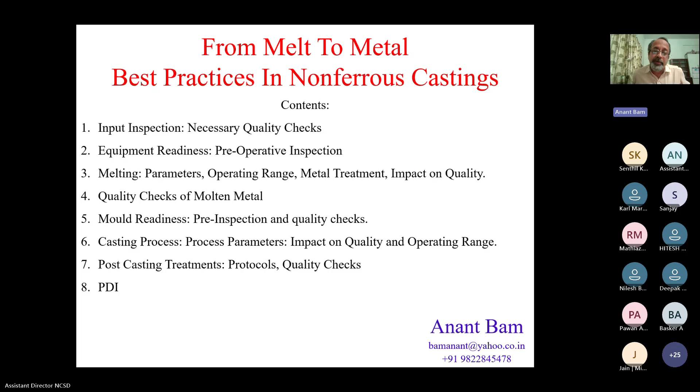Since the presentation was made in a hurry, the slides are less than 70. And if I wish, and if I dedicate more time on it, it can exceed 300 slides. But I will fill the gap by my oration and by my narration. Next slide, please.

Now we come to the necessary quality checks for the input materials. For every foundry, let it be large organized foundry or an MSME foundry, the input material is basic ingots or the scrap, that is turning, boring, the foundry returns or the bought out scrap.

Second important input is the fuel for combustion in the furnace or in any other equipment. Third input is treatment chemicals. Fourth is mold material, coatings, lubricants. Then comes the die coolant, the heat treatment quenching media, and other coolants. And last but not the least are the input materials for post casting treatments, like shot blasting shots, then vibro finishing beads, surface treatment chemicals, let it be anodizing, electroplating, powder coating, painting, anything. And remember, since we are talking on the best practices from melt to metal, we have to consider all these aspects from input to output.

And if we maintain quality checks right from the input, then naturally we will get a good quality output. Next slide, please.

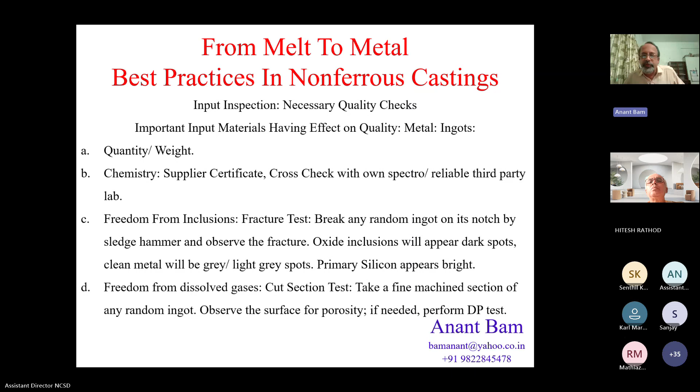Freedom from dissolved gases — again, you have to take a cut section with a hacksaw or bandsaw, and machine that section with a smooth finishing facility using a fly cutter or reverse tool on a lathe, so a smooth machined finish is achieved. Then you observe that smooth surface for porosity, if needed, by performing a dye penetration test.

Although it is not intentionally put or induced, this oxide is present in the ingot due to the process itself, because it was not filtered. Aluminum oxide appears much darker in fractured condition than the mother metal, and naturally we are paying for aluminum, not aluminum oxide. Apart from the commercial issue, aluminum oxide is a very dangerous element for the quality of castings.

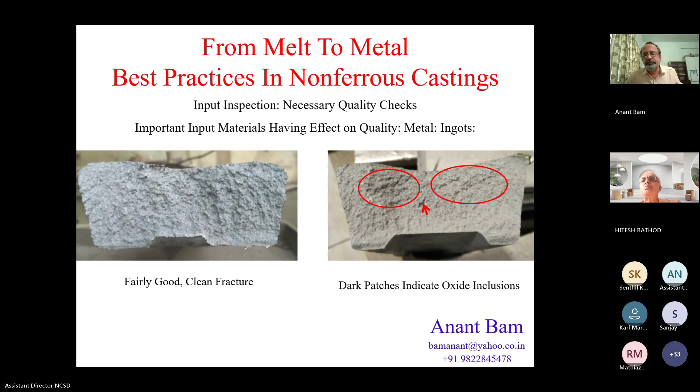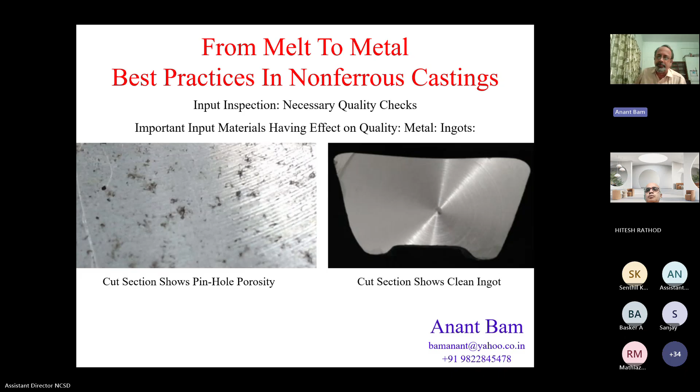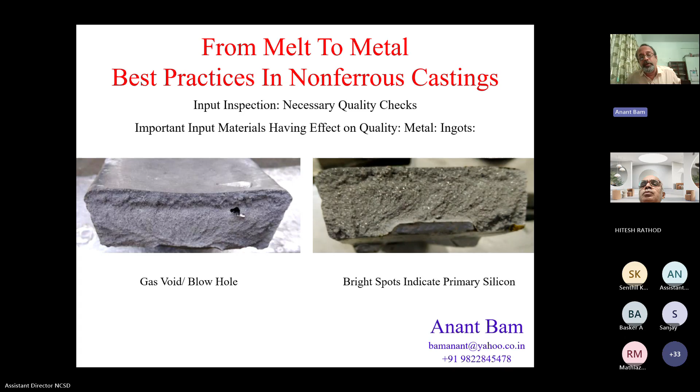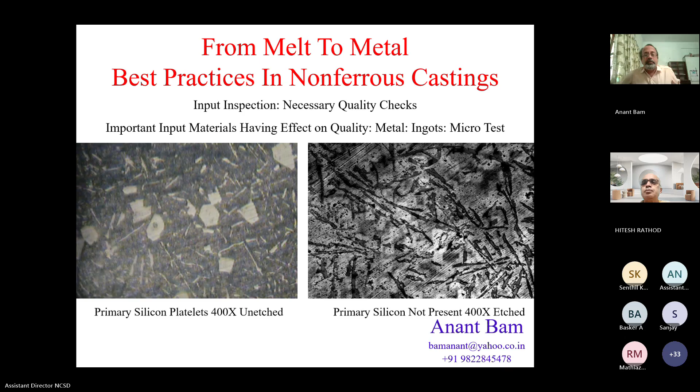If we have in-house scrap as the return or as an input material, then we have to have complete traceability of that material during the total process life cycle. Japanese management tools like Kanban card will help you, or a bin card, to identify and maintain that particular material, its own identity with its alloy chemistry.

When any scrap or any input, let it be in-house or bought out, which is unidentified or unknown scrap, the best way is to mix it thoroughly. If you have got 100 bags of turning borings, empty them all on a clean floor, mix them thoroughly, take a 1 kg sample, melt it in a small crucible or furnace or with a gas burner, take a spectro coin from that and check its chemistry. That will give you the average chemistry of that unknown turning boring.

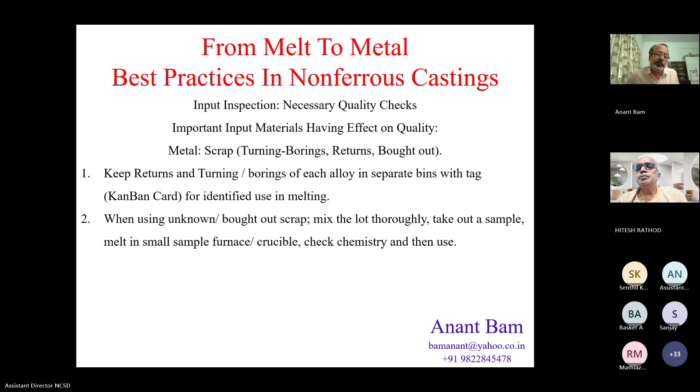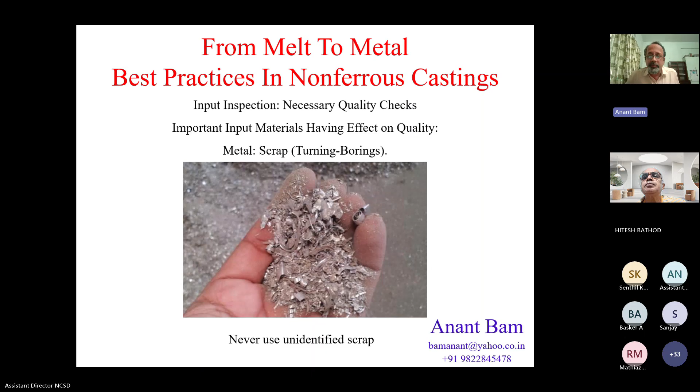For gas-fired furnaces, you get a self-certification from the supplier that the calorific value of the gas supplied to you during this fortnight is XYZ. They give you an average of every day, a daily average submitted to you on a fortnightly basis. That's the standard quality system of every gas supplier. From the LPG supplier also, you get a calorific value certificate.

For the liquid fuels, which is LDO, furnace oil, diesel, or LSHS - nowadays LSHS and FO are not preferred because of the pollution control norms. LDO is quite popular.

So first, again, check the quantity. Then check the viscosity or the density. Check the calorific value. If you don't have a calorimeter, ask for the supplier certificate and randomly get the calorific value checked from a NABL accredited lab. Check for contamination. If you are using heavy oils, that is furnace oil or LSHS, then water contamination is quite likely.

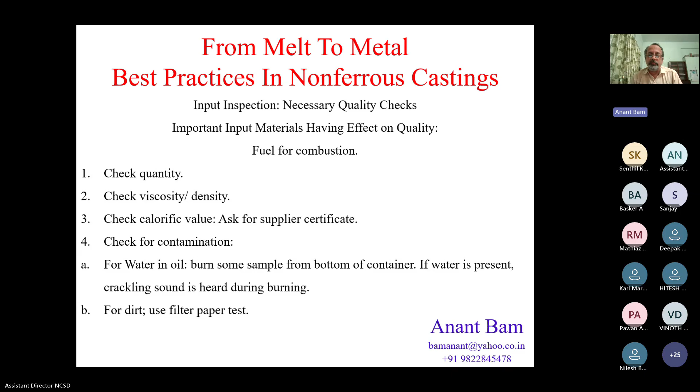So these 2 or 3 tests will qualify your input material, which is furnace oil or fuel for your own furnace.

Treatment chemicals. I see that there are 2 people from Ceraflux group attending this meeting, somebody from iTech, then Mr. Gajanan Kadukar, and mostly Mr. Dhumal is also there on the line. So they will understand it very well.

Majority of treatment chemicals, which are salts, are hygroscopic in nature. Secondly, some proprietary treatment chemicals, which are mixtures of a variety of salts and other chemicals, have their own internal reactions going on as well. Hence, every chemical has got its own shelf life. So first and foremost, before accepting any treatment chemical, check for the expiry date. If you are getting a lot which is close to its expiry, ask for a hefty discount and consume that lot within the expiry period itself. If you are not able to consume it, there is no guarantee from the supplier side for the performance of the chemical.

Next is naturally check the quantity. Then ensure dryness of powder flux or tablet or pressed tablet of any degasser or other chemical, because these are hygroscopic materials. Usually all these materials have got their own color, and if they absorb moisture, the color darkens substantially. So observe the color of the chemical also. If any moisture is present in it, then it will not be free flowing, it will form a lump. So ensure dryness of the powdery flux as well as tablets.

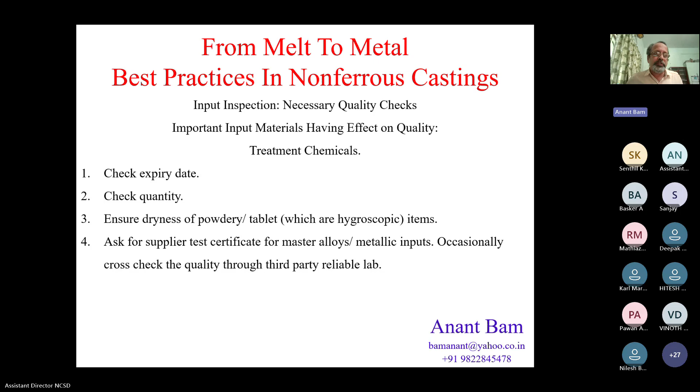Next input material is sand for molding as well as core making. It has got a direct impact on the surface finish of your product. Apart from surface finish, it has a direct impact on the quality of your outcome by way of its permeability, its loss on ignition or gas generation, its binding properties, and many such things.

First of all, for the sand, check the sieve analysis. If you have got a macroscope or a stereo microscope, check the angularity. If you have facility, check the silica content or go for the supplier certification. From the binder side, if you are using organic binders, with the resin and hardener system, you can have a quick shop floor test by preparing a sample, maybe 100 grams of prepared sand. You can put it into a random mold and check for the stripping time, the setting time, and curing time, then check for the hardness of that particular prepared sample.

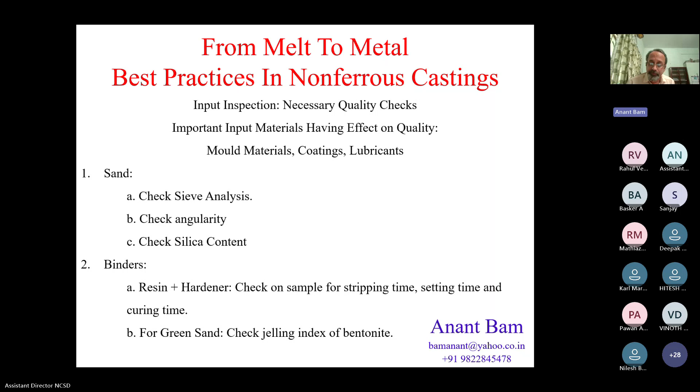This is a sample of sieve analysis. If you have got a single peak, that sand is of average quality. And if the peak is at the same point but the graph moves gradually up like a bell-shaped curve, then it's slightly better, a good quality of sand.

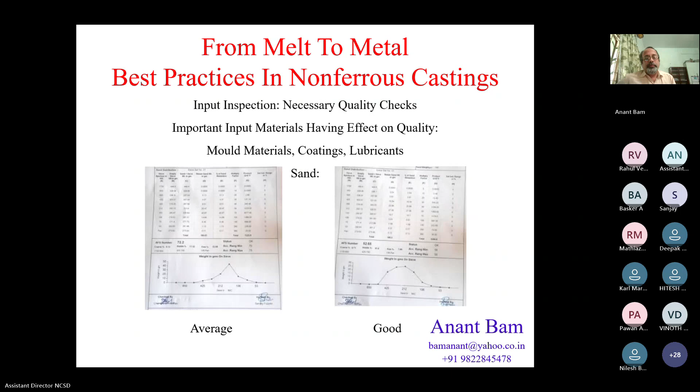Coatings. Coatings are applicable to sand mold, sand core, as well as to the die surface. Coating is the final element which delivers its own surface finish to the casting, but before that, its primary function is to create a barrier surface between the metal and the mold, to prevent the metal mold reaction, coating is necessary.

So for any coating, the first and foremost test is density test or viscosity test, and a quick test can be checked by a B4 cup or by a buoyancy meter. Next slide, please.

This is an image of a B4 cup. It's a conical cup with an aperture or measured hole on the bottom. The volume is also known. There is a marking, a stand, and you have to use a stopwatch along with it.

The process is: put the cup on the stand, put an empty vessel at the bottom, hold your finger from the bottom of the hole on the cup to plug it, pour the prepared coating into the cup up to the marking line, and simultaneously release your finger from the bottom hole and start the stopwatch.

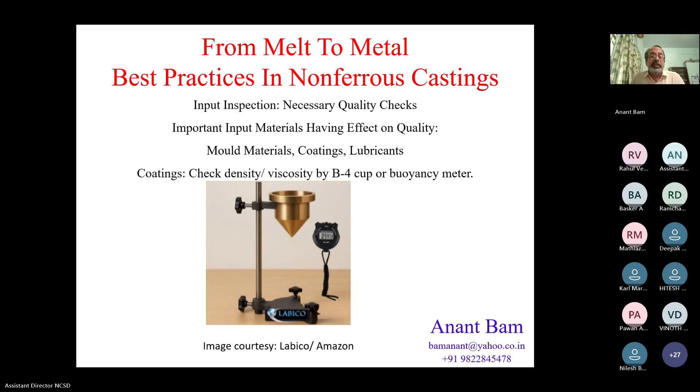Lubricants. For high pressure die casting, everybody is using lubricant. The main function of lubricant is again to prevent soldering, and the secondary function is to have thermal balance of the die surface.

Even today, a lot of foundries, or the majority of foundries, are using mineral oil as the basic lubricant, emulsified in water, maybe 1%, 2%, 5%. The dilution depends on the manufacturer's recommendation and the intricacy of your casting. So first and foremost, check the dilution of the lubricant.

Rather, it's very difficult to check the dilution. So you have to ensure a process of making correct dilution of the lubricant. You have to prepare a recipe by which the recommended dilution of the lubricant can be achieved.

I have witnessed a case in a very reputed foundry making more than 10,000 tons a month of aluminum pressure die casting. They were not monitoring the dilution of lubricant. There was a complaint of frequent soldering and blackening of the die surface.

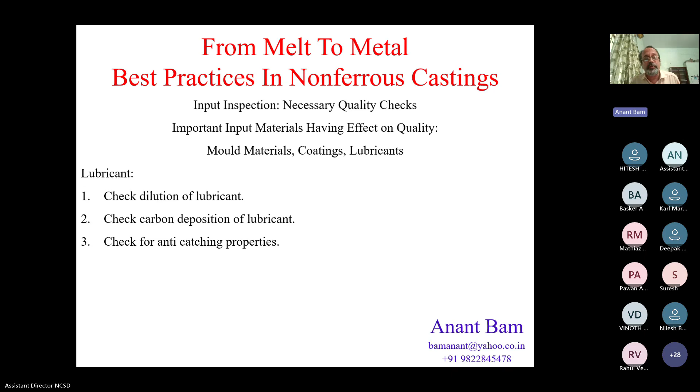When a system was set up for measuring the mother lubricant, measuring the diluting water, measuring the TDS and quality of the diluting water, and using filtration before passing it onto the lubricant pump, these defects were gone. Next slide, please.

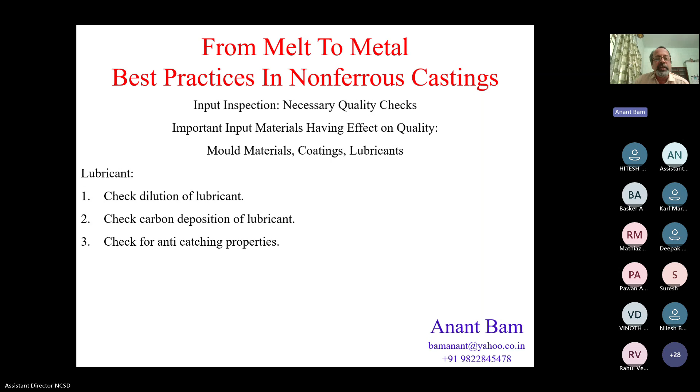Now for the coolant or quenching media of the heat treatment furnace, first and foremost is to check for TDS, total dissolved solids, or the salinity of the water. Excess TDS will lead to salt deposition, calcination, and loss of cooling effect in the cooling line.

Any salt or contamination in the quenching media will lead to discoloration or blackening of the casting after heat treatment. And once the casting blackens during quenching, it is very difficult to get back its own white luster. So you have to be very careful and use preferably demineralized or DM water for quenching media as well as in the cooling lines.

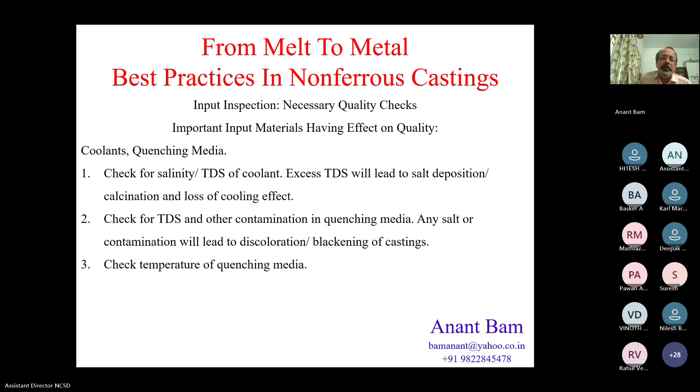Now we move on to other input materials for post casting treatments: shot blasting, glass bead blasting, vibro finishing, and other surface treatments. For aluminum shot blasting, stainless steel cut wire shots are highly preferred. I recommend them because they last long and do not break easily. They do not deliver its own color onto the casting. Preferable size is 0.3 mm to 0.7 mm for aluminum and 0.5 mm to 1 mm for copper alloys.

How many of you are using a mixture of 2 or more sizes of shots? Please comment or raise your hand. I want this session to be interactive. How many of the audience is using a mixture of 2 or more sizes of shots in shot blasting?

Shailesh, have you spoken to speaker or phone? What do you say, huh? We are talking currently, sir, we are talking with him. Yeah. Yes, sir. Sir, he is rejoining, sir, it will take 1 or 2 minutes, sir. Shailesh, what happened? Network connection, he is joining by mobile. Okay.

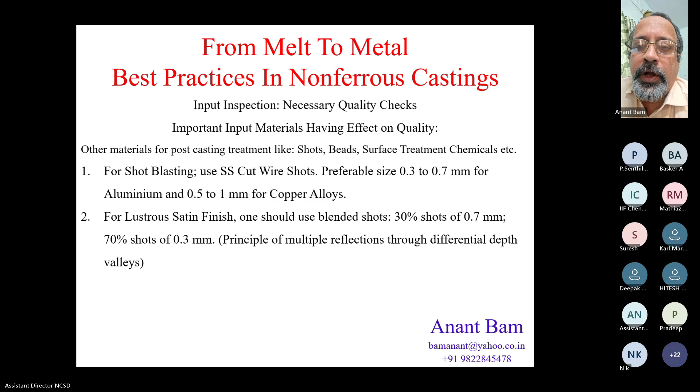So I was talking about shot blasting and the benefits of using mixed shots. When we use mixed shots, the indentations or depressions created on the surface by shot blasting are of mixed sizes, and that creates multiple reflections of the incident light. These multiple reflections make the casting brighter and more lustrous, like a metallic satin finish. Hence, if possible, I recommend using such a mixture of shots. The finish you get is out of this world, and you will fall in love with it. Nothing wrong in using single size of shots, but using a mixture of shots is the next level of quality in surface treatment.

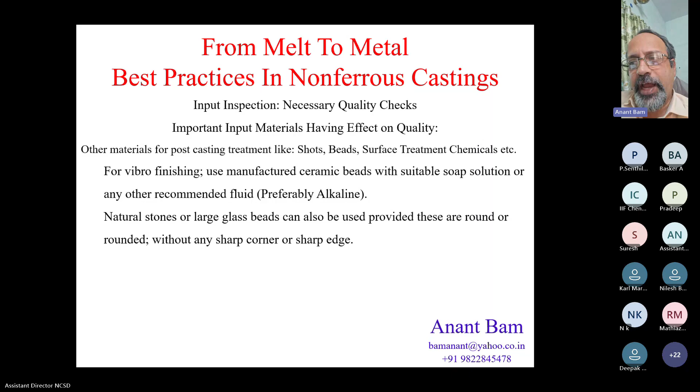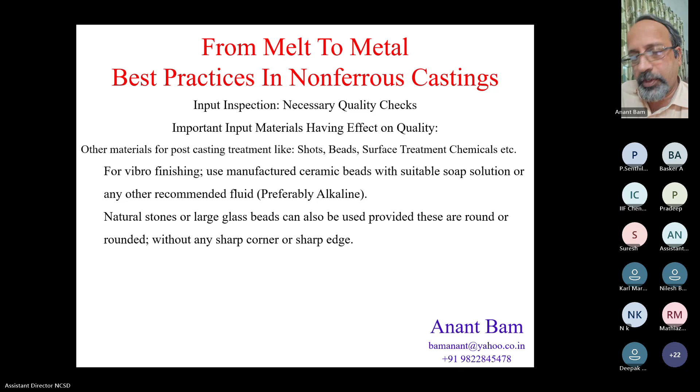Now we come to the equipment part of it, equipment readiness. Remember, we have not started the casting process as yet; our checklist is still going on the input side, even now, on the equipment. First inspection is for the furnace lining. Second is for the crucible condition. Third is for burner cleanliness. Then oil preheater and pump unit operation, filter operation. Then, if you are using resistance furnaces, condition of coils, their connections, and their maximum current drawing capacity. Along with the furnaces, we have thermocouples and temperature indicators, and PLCs to control or operate the furnace based on the inputs from the thermocouple. Then we have the degassing unit, and other quality instruments like the reduced pressure test apparatus or density index apparatus, and any other quality instrument. Next slide, please.

Check the lining of the furnace for any likely crack, worn out lining, or damaged lining if you are using an induction furnace. Repair it immediately if observed. Monitor the lining life and change the lining at the recommended number of heats or recommended number of hours of operation, irrespective of the condition of the lining. This becomes a part of total productive maintenance, TPM. If you maintain the lining in good condition, then naturally the downtime of the equipment is zero.

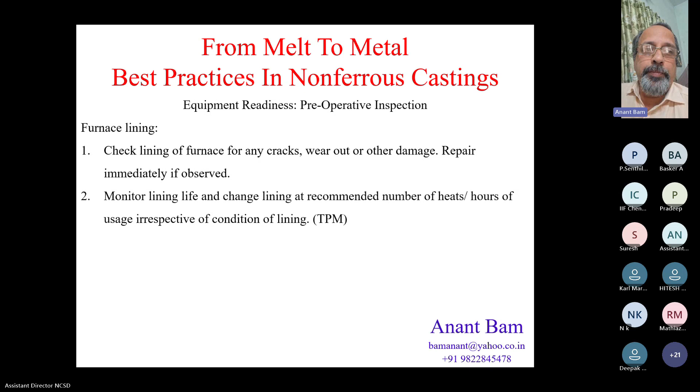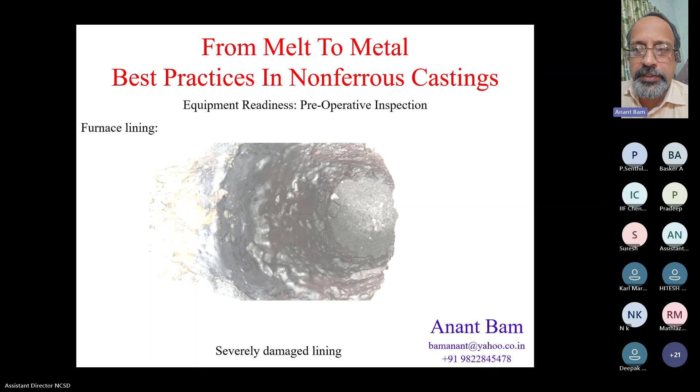Crucible condition: before starting, check the crucible for any cracks, check for oxide buildup. It's a frequent, routine check — all checks are daily checks or every heat-wise checks. Before you put in any new material, check the crucible condition, check the oxide buildup, check the thermocouples for oxide buildup, and check other equipment like ladles, spoons, or any hand tools. All the checks are routine and daily checks; there is no escape to it.

Monitor the crucible life by hours of use or number of heats, and change the crucible after the recommended life, irrespective of its condition. Because if the crucible cracks or fails during operation, it becomes a very big mess to clean the furnace. It may invite short circuit, it may invite accidental shocks to the operator, and the repairs or damages from a broken crucible during operation take a few days. Instead, if the recommended lifespan is over, on a weekly off just change the crucible even if it is apparently good or looks to be in working condition. That will prevent all these pitfalls, and it's again a TPM activity.

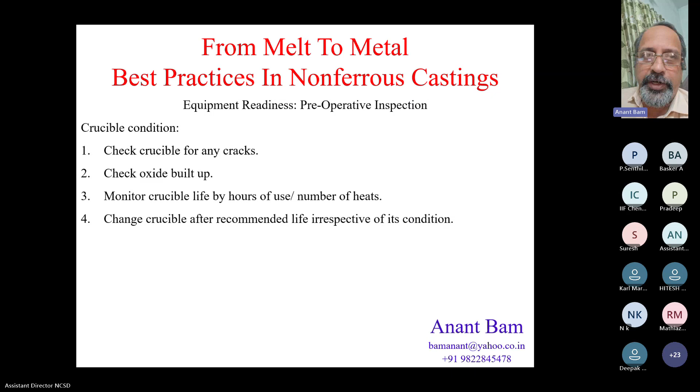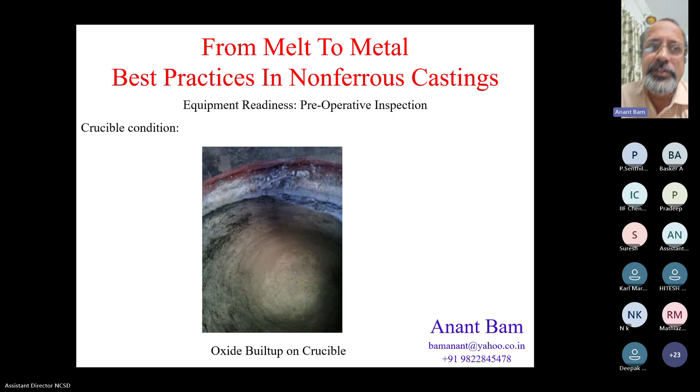So if such a thick oxide lining is present on the crucible, it keeps dissolving into the molten metal, creating oxide inclusions in your casting — that's a serious quality threat. But apart from that, aluminum oxide is a bad conductor of heat, so the thermal conductivity of the crucible reduces drastically, and hence to melt the metal you require more and more energy input. That becomes unviable. Next slide, please.

Burner cleanliness. Check the burner nozzles daily and clean them thoroughly. Check the airflow diaphragm or the baffle and its adjustments. Check blower pressure and flow. And after all that, finally adjust the flame to reducing atmosphere and correct dwell time.

I got a photograph for that. I will explain that into that slide. Next slide, please.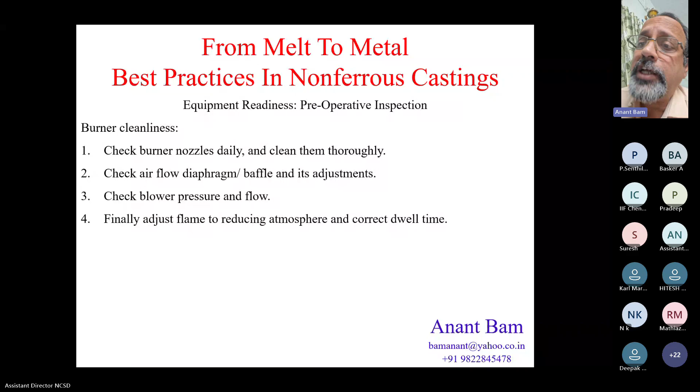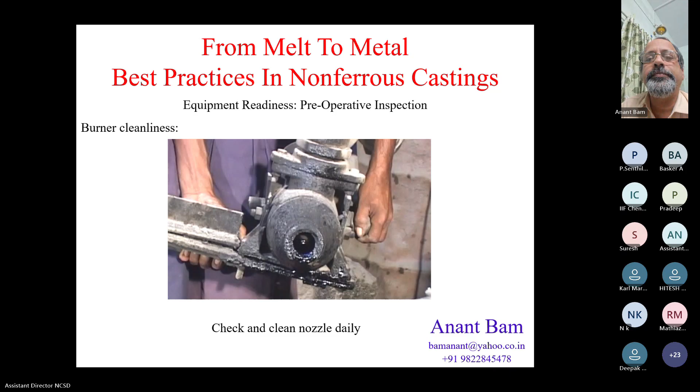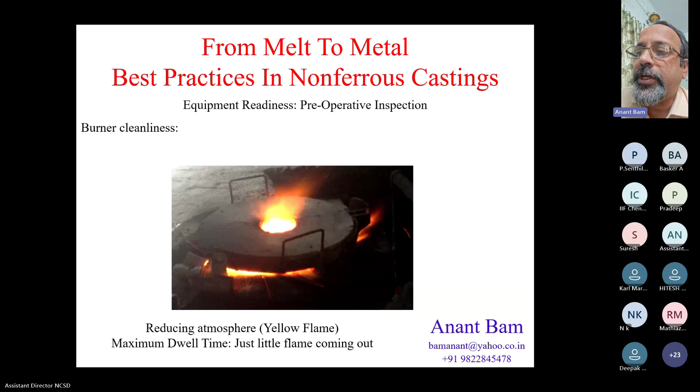That's the first point. The second point is that a very little amount of flame is coming out from the aperture of the lid. That means the flame is taking its maximum time inside the furnace chamber, and very little of it is going out by way of flue. So this is an indication of efficient operation along with reducing atmosphere.

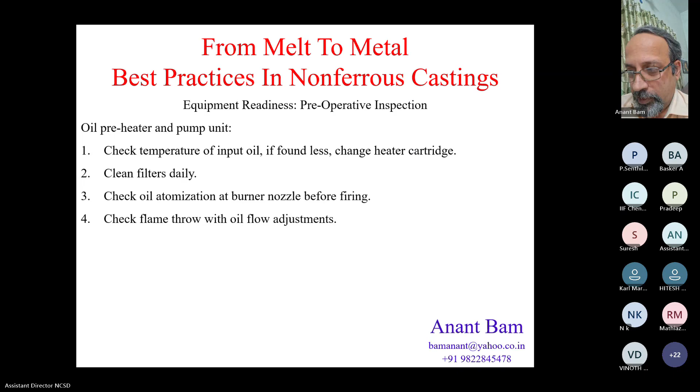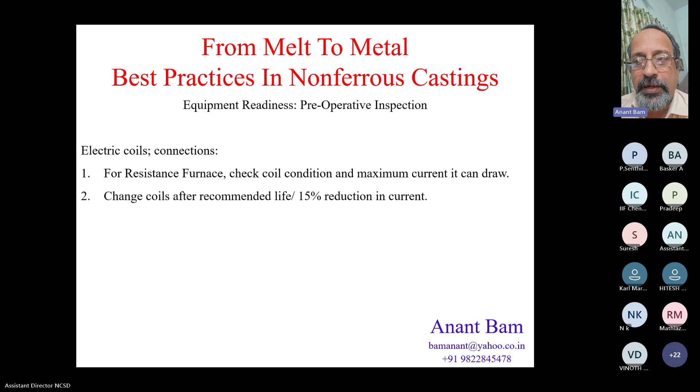The moment it reduces by 15% or more, then it's time to change the coils, because such a reduction in current carrying capacity happens due to oxidation of the coil element or the kanthal metal in the coil. Next slide, please.

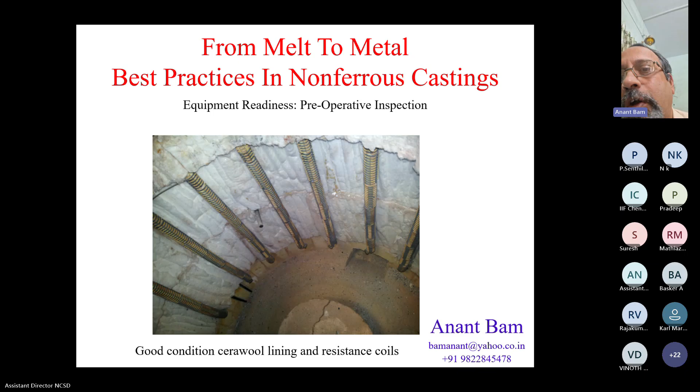This is a typical view of an electric resistance furnace before fitment of the crucible. You can see that the ceramic foam or cerawool lining is in very good condition, as well as the heater elements, the coils, which are also in good condition.

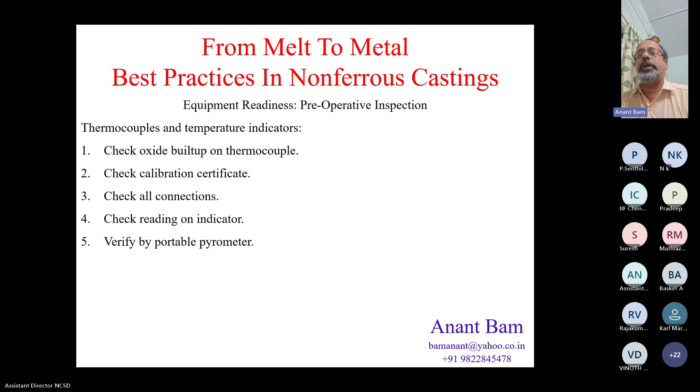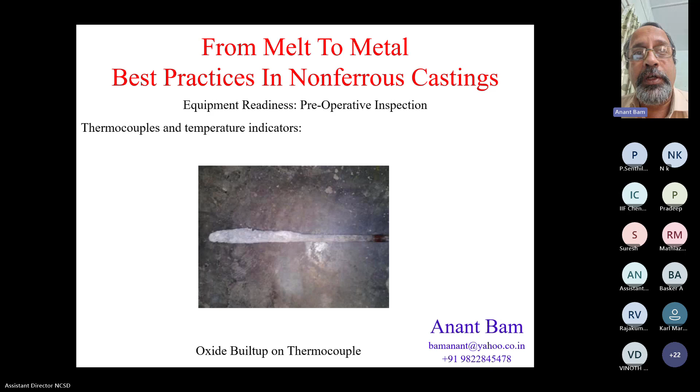Here is a photograph of a dip-type thermocouple having a very large deposit of oxide on it. As I told you, these oxides keep dissolving into the metal, making it dirty. It's also a bad conductor of heat, so the reading taken by the thermocouple is a false reading. The metal might be quite hot, hotter than the reading shown by such a thermocouple.

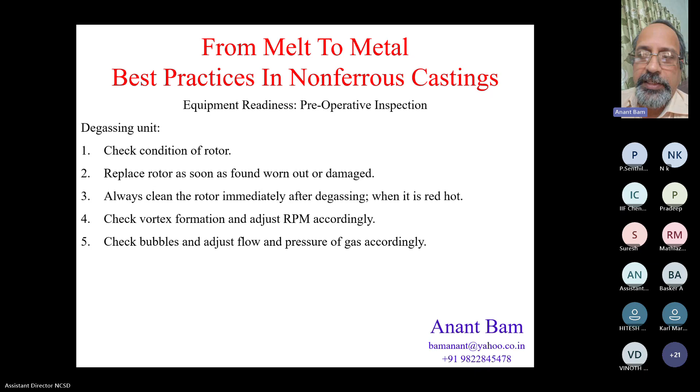If you find such metallic particles on top of the furnace, rest assured your bubble size is perfect. With a vortex showing a 4-inch level difference between sidewall and the eye of the vortex, and deposition of fine metal particles on top of the furnace, these are the two indicators that your rotor RPM is good and your bubble size is good—you attain maximum efficiency of degassing in such a condition. Next slide, please.

This is a photograph of the dirtiest rotor I have ever seen. I have to tell you that this white, inverted-T-shaped thing is the rotor of the degassing machine. I cannot see any fin or rib—all I can see is oxide, oxide, and oxide, thoroughly deposited for ages. Naturally, the whole shaft is also clogged.

Nitrogen or argon is not coming out, this thing is not able to churn, and hence degassing is just for show.

Again, this is first-hand information—I was a consultant there. I was called in for a day because degassing was not effective. Even after doing degassing for 2 hours, their density index was not coming within range. They asked me to kindly advise them, and the matter was solved on site itself.

If you have such a dirty rotor, nobody on this earth can degas your material. The best way is to change the rotor and then maintain it in good condition by cleaning it every time it comes out of the furnace. Next slide, please.

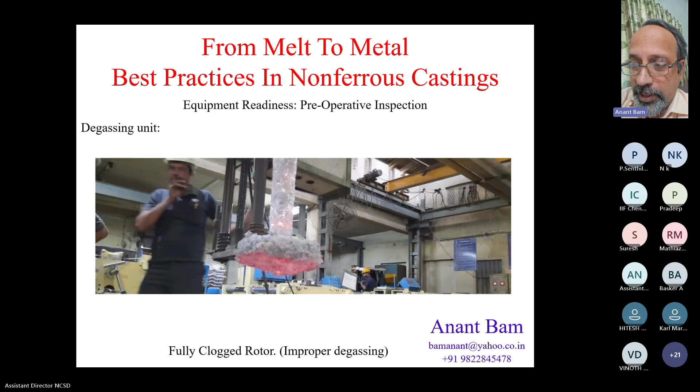Equipment readiness of reduced pressure test apparatus, density index apparatus, and other instruments. Check oil level of the vacuum pump. This is the first and foremost check.

The oil in the vacuum pump is like blood in your system, blood in your body. The moment the oil level in the vacuum pump drops, the vanes of the pump start rubbing on the surface. And after such rubbing, maybe in 1 hour or 2 hours, the pump fails. It fails to create vacuum. And why? Because somebody did not top up the oil. It is not a frequent top up. The requirement of oil is hardly 300 ml, and the top up required is maybe once in 6 months or so. But if you don't top it up, you lose the pump.

Second, check the vacuum gauge and confirm vacuum formation. Start the vacuum or the reduced pressure test apparatus without any metal or sampling crucible within it. Close the lid. See that the vacuum gauge is indicating vacuum. Try to lift the lid at 80 millibar partial vacuum. No person by their own hands can lift the lid. The vacuum created is so strong that if you try to lift the lid, the whole machine, 50 kg, 100 kg, gets lifted along with it. So that's a simple test of effectiveness of vacuum creation.

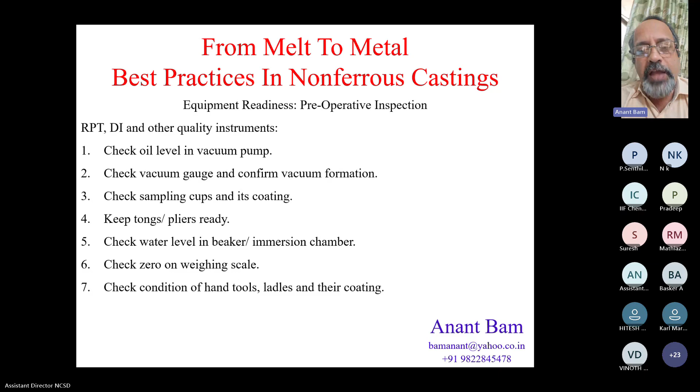Now we come to principles of melting. Melt the metal as quickly as possible. Melt it with minimum energy consumption. Achieve complete solution of alloying elements or any top-up materials. Melt the metal in as clean a condition as possible. Keep it gas-free. Avoid overheating and minimize melting loss.

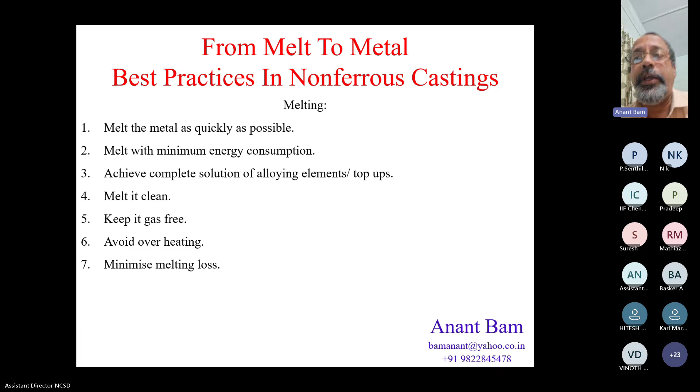Everything of it is very well explained in my earlier presentation on melting and metal treatment, so only this one slide I have taken from that. I'm not going to explain it further because we have already exceeded the scheduled timeline. Move on to next slide.

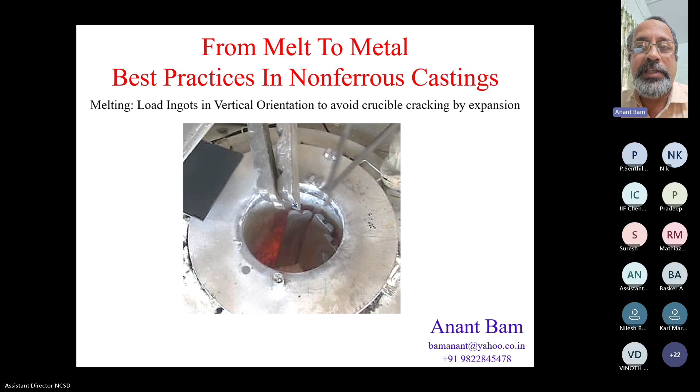While starting the melting in the empty crucible, one has to take care that ingots have to be placed vertically and they have to be loosely packed, not closely packed, because before melting, the ingots expand. There is thermal expansion of aluminum. And if the ingots are not loosely packed, that expansion adds one onto other, and literally it leads to cracking of the crucible by thermal expansion. So ensure that the ingots are stacked vertically and loosely packed. Next slide.

We go on to metal treatment, again only one slide from the previous metal treatment presentation. First, metal treatment is cleaning. It is usually done by flux. But in recent times, Japanese foundries are avoiding fluxes and moving to inert gas or vacuum melting to avoid oxide generation itself. Why do we need to clean the metal? Because either the ingots or the input material itself is dirty, or there is freshly induced, freshly created aluminum oxide during the melting process itself. Hence, we have to clean that oxide. We have to separate that oxide from the metal by applying cleaning fluxes.

So if the metal is clean initially itself, do we really need to clean it? Again, the answer is no. So the Japanese have moved ahead and they have avoided fluxes by way of vacuum or inert gas melting.

Some foundries in India, especially Maruti Suzuki, are trying that method, and they have succeeded substantially in it. But even now, even today, they are not able to eliminate flux. They have reduced consumption of flux drastically, but still they have not eliminated it. But very soon it will happen.

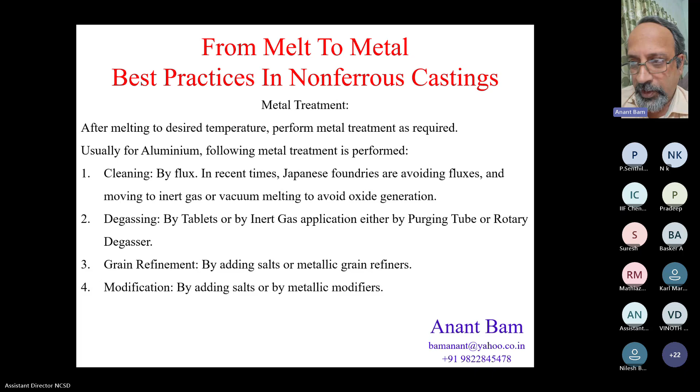Modification of silicon increases or leads to better elongation, and also it helps in giving quick response to heat treatment. Next slide, please.

These are photographs of macro structure. Every sample is 40 mm diameter. On the left hand side is without grain refinement. On the right hand side is with grain refinement.

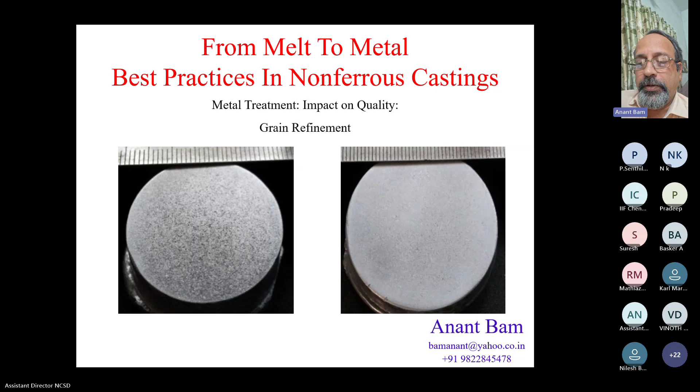Next slide. This is ASM grain size classification number. Number 1 is finest grains, number 6 are the coarsest grains. As per ASM macro grain size classification, there are 6 varieties: 1, 2, 3, 4, 5, 6.

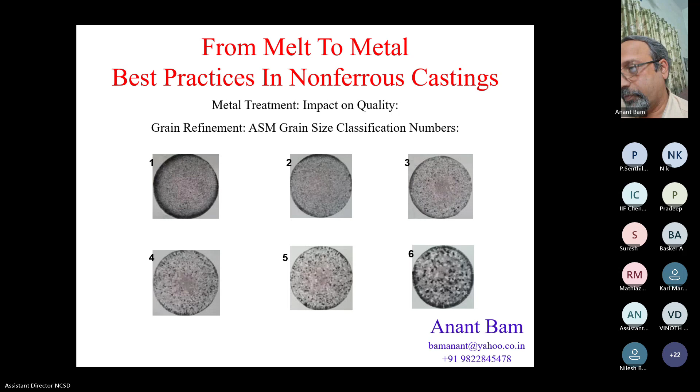These are to be checked on macrograph of 40 mm diameter sample. You take a fine machining cut on it, or you scrape it on a belt grinder, and then perform etching by macro agent, either HF or preferably the etching agent Tucker's etch. Next slide, please.

Next slide, please. This is ASM classification of levels of modification. Level 1 is unmodified, level 6 is super modified.

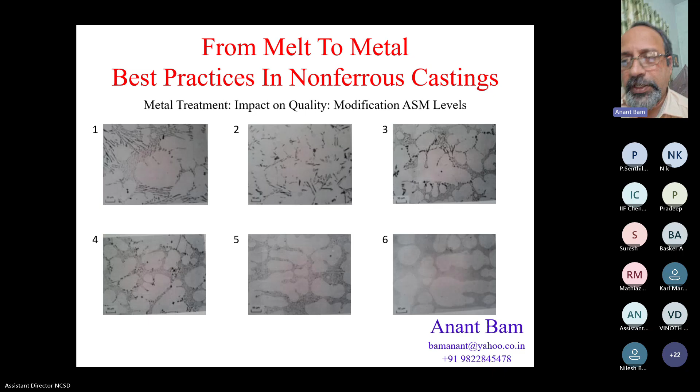Practically achievable levels are level 3 and 4. With little difficulty and good quality control, level 5 is also achievable. But level 6 can be achieved only in laboratory scale. Also, it is not required in any practical application. Even for aerospace application, level 4 or level 5 modification is recommended. Next slide, please.

Quality checks of molten metal: preferably you should have a temperature log, then you should have a chemistry report record, you should have a density index record, and you should have a K mold record. Next slide.

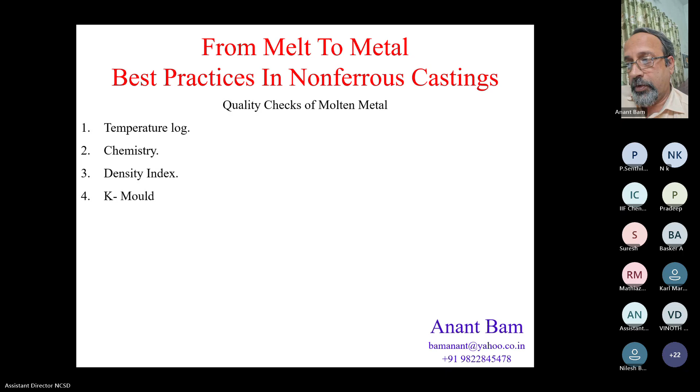When you are refining the material by titanium and boron, the effectiveness of grain refiners vanishes after high temperature, maybe exceeding 780 degrees Celsius, and that change is irreversible. The titanium is visible in spectrometer, but it fails to refine the grains. So you have to ensure that in the life cycle of casting, that is from solid to melting to holding to treatment to casting again, it has not crossed 780 degrees Celsius at any point of time.

That is why it is important to have a temperature log, or to have a permanent dip type thermocouple connected to PLC, having a direct shut off control on the furnace. And the range should be set in such a way to allow certain buffer zone.

Because the furnace lining is usually at 900 or 1000 degrees Celsius coil temperature, and the metal is at 730, 740, 720 degrees Celsius, the delta T, the temperature difference, is to the tune of 300 degrees Celsius, 250 to 300. The heat transfer formula for heat transfer is mCp delta T.

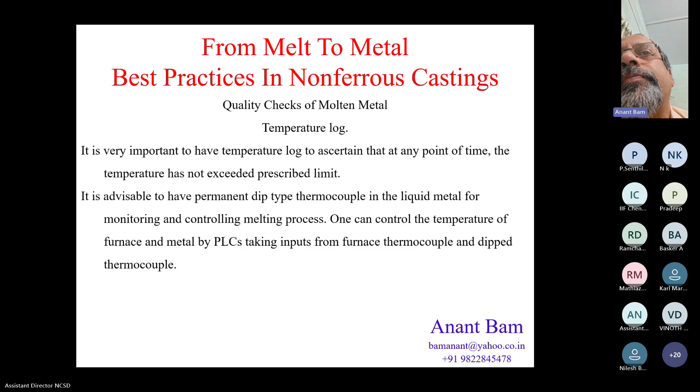Chemistry: every casting qualifies for customer acceptance only if chemical composition is within prescribed limits. Check button samples for spectrometry before the metal treatment for the basic chemistry, basic elements. If found acceptable, then only proceed for metal treatment. Otherwise, balance the chemistry by alloy addition or by diluting, as the case may be.

Cross-check final chemistry after treatment for verifying titanium, boron, sodium, strontium, or whatever you have added as metal treatment element. Sufficient percentage of titanium and strontium ensures grain refinement and modification. Next slide, please.

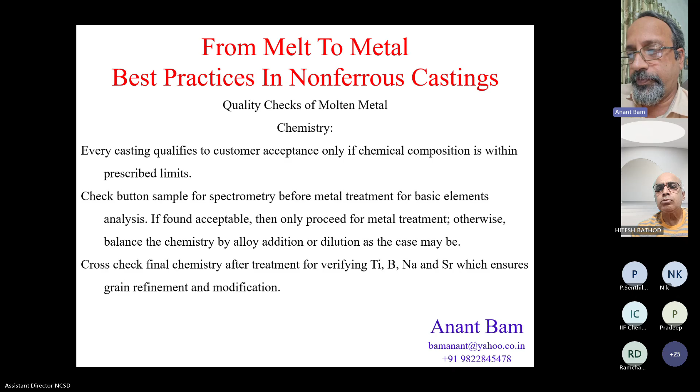A typical spectro button. Next slide.

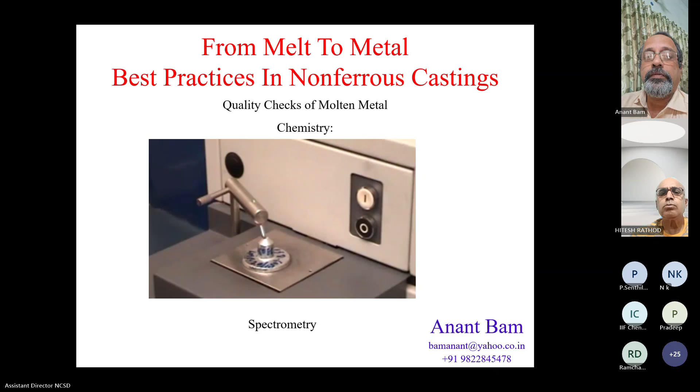Check density index before pouring and at every 30 minute interval during holding. For commercial applications, density index should be below 10%. For leak-proof engineering castings or structural castings, it should be below 5%. For critical castings or helium leak-proof castings, it should be between 1% and 3.5%. For electric conductivity and aerospace grade castings, density index should be below 1.5%.

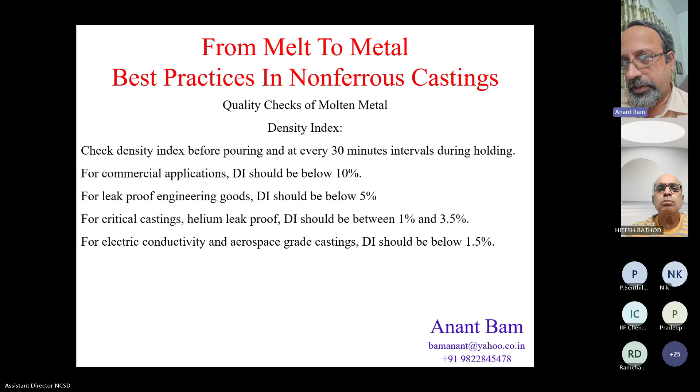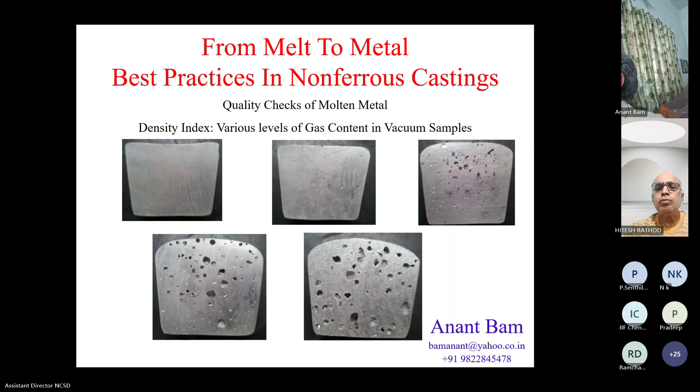Next slide, please. K mold. The K value should be checked and maintained below the prescribed value. Every customer should recommend what the K value should be. Ideally, the K value should be 0.

One must preserve all these samples - spectro button, density index samples, and K mold samples - for the time prescribed by the buyer, or for a minimum of 3 months. Next slide.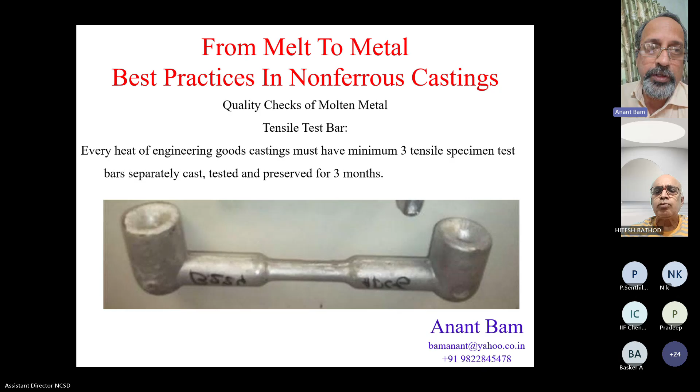This is a sample of a separately cast test bar. Sometimes you have to cast an integral test bar. Sometimes you have to take a test bar by cutting a casting, sacrificing that casting. It depends on the quality requirements of your buyer. Next slide.

Now, input inspection for sand casting. Check quality of sand, check the mold hardness, check for smooth, hurdle-free surface and non-friable edges. Next slide.

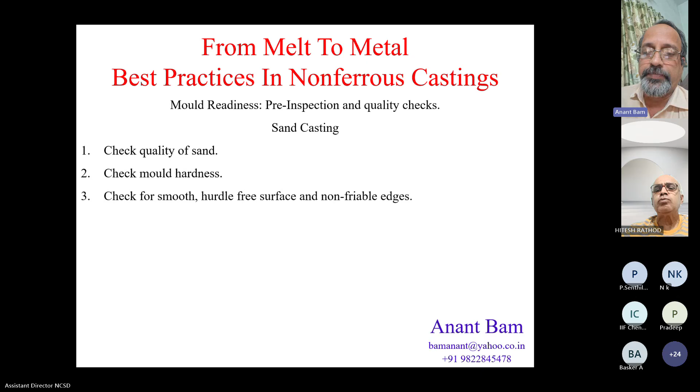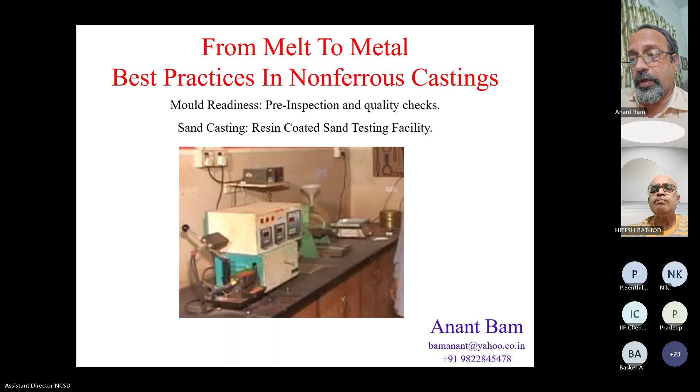For resin coated sand, there are other tests like tensile test, hot tensile test, stick point, apart from the standard sieve analysis. Next slide.

Typical photographs of shell core making, then core setting, and dip type core coating. Next slide.

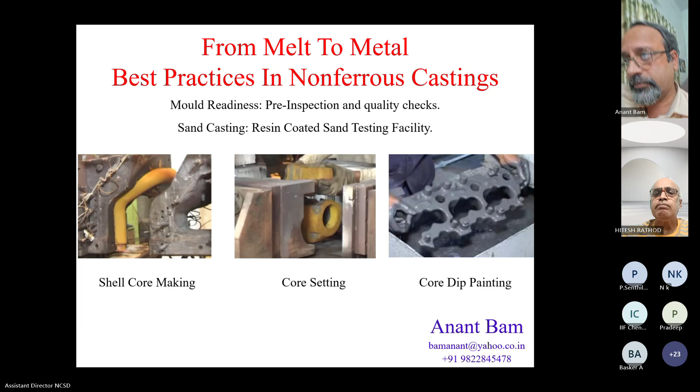In case of die casting, you have to monitor die temperature, the die coating and its thickness, and cleanliness of the vents. Next slide.

99% of the time, the die is preheated by gas burners. In case of pressure die casting, the thermoregulator takes care of it. Next slide.

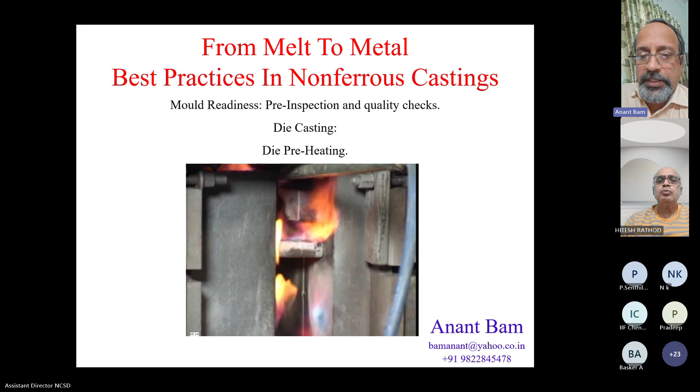You have to monitor and record die temperature frequently. Next slide.

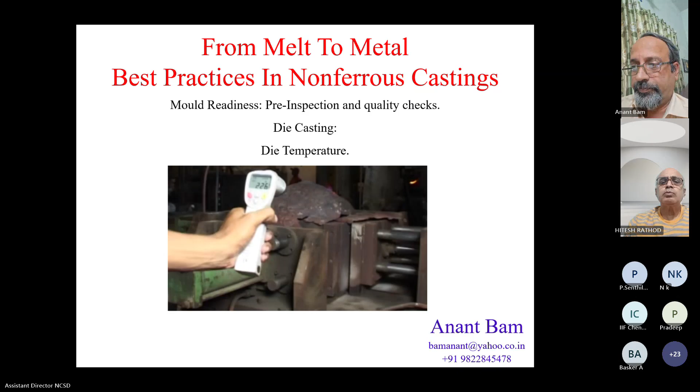On the left hand side is spray coating on a hot die surface. On the right hand side is application of thick coating, or riser coating, by brush. Next slide.

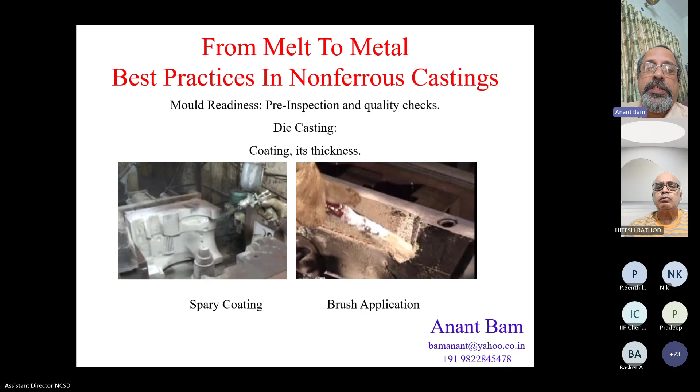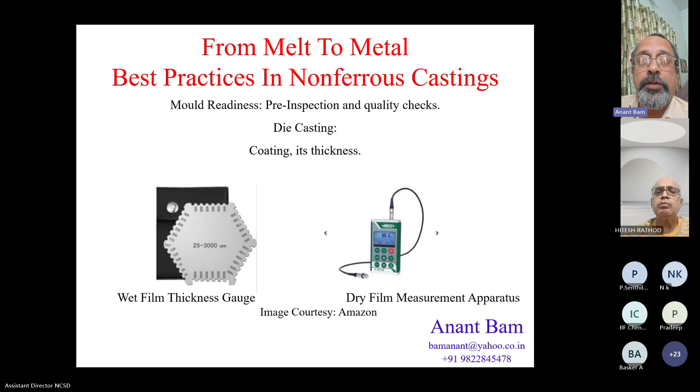Next slide, please. On the left hand side is a typical photo of a wet film thickness gauge. This is a hexagonal gauge. You can also get a rectangular gauge having one or two sides with gauging serrations. On the right hand side is the dry film thickness measurement apparatus - not ultrasound, it is a magnetic gauge.

Next slide, please. For the clean vents, I did not get any photograph, but if you have access to our IIF NCTS CDs on gravity die casting, there is a separate chapter on venting. You can go through that. Next slide, please.

Remember the 4 T's in any casting process, be it ferrous, non-ferrous, aluminum, copper, anything. These are the 4 T's which govern the casting process: time, temperature, treatment - these are 3 scientific T's which can be controlled and monitored. But the 4th T, the temperament of the operator, is not controllable. So you have to deal with it and move toward automation of the process as quickly as possible to eliminate this 4th T, or the human factor of rejection.

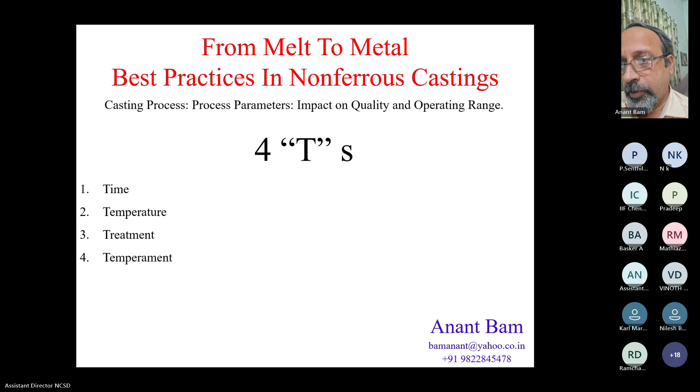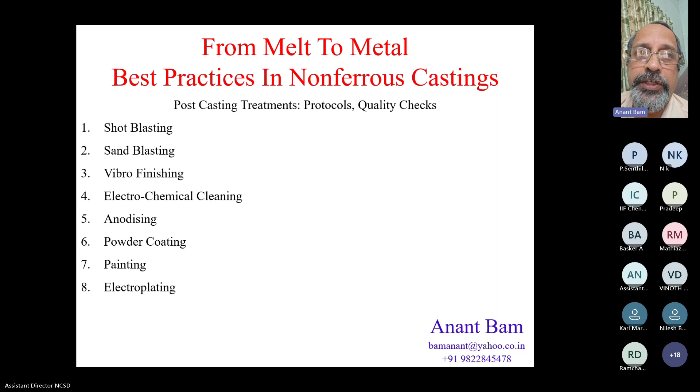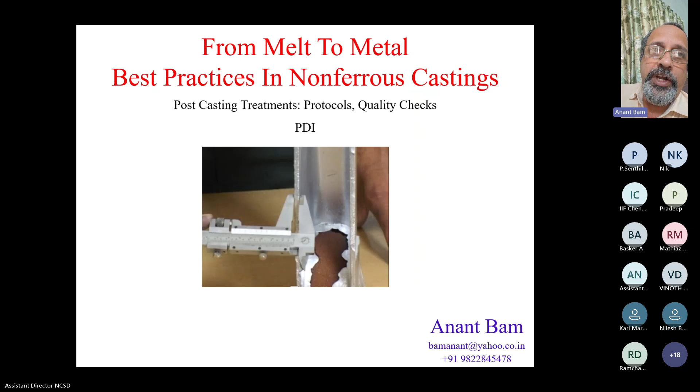Sir, anyone has any questions?

Hello sir, this is Kalmax from Ditech India. Sir, thanks for this wonderful session. I am a fresher in this field. I was able to learn many new things, but I want to know the reason for electroplating of the post-casting process, sir. May I know the reason for electroplating?

Electroplating is a very common process for many aesthetic components. For example, diamond cut alloy wheels are electroplated, chrome plated. The reason for electroplating is as per the customer requirement. If the customer wants it electroplated, it has to be electroplated. I think it is for the smooth surface finish or the aesthetic look of the casting, sir.